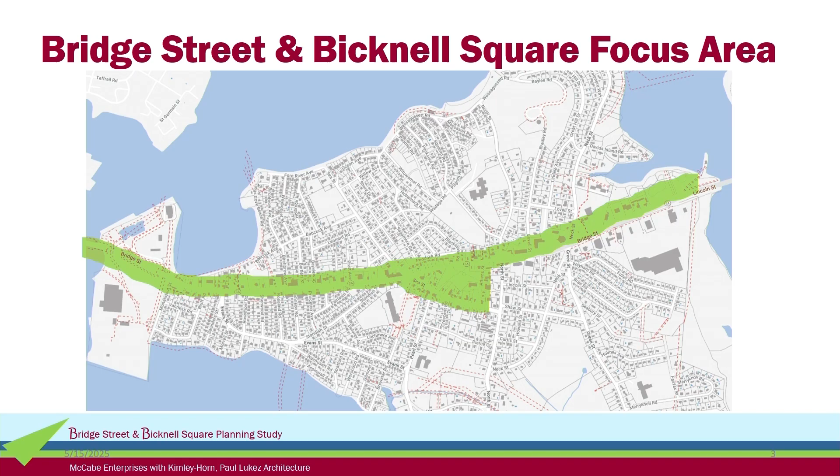The bright green is our focus area. Why we did a planning study wasn't just because the town got a grant. It's because there's been a long-time safety concern about speed and congestion on Bridge Street. There's been concerns about vacancies and really limited new investment in businesses and properties along Bridge Street. So things are getting a little tired in places. That was some of the impetus. Some of the key questions are: how do we make Bridge Street look better and be safer at the same time? So there was a dual focus there. And is the existing zoning helping or hurting new investment?

And how can we leverage what the town has been spending, much through grant money, but also all your tax money, in Beals Park as well as Wessagusset Beach, that are major public improvements in North Weymouth? So how can we leverage that to stimulate more private investment? Some of the faces I recognize from prior meetings, some of you may be new, so let's just do a quick overview of Bridge Street.

The study area is 1.85 miles, with 8.5 acres of pavement. There's almost 500,000 square feet of commercial space along Bridge Street, and 114 businesses in North Weymouth employing about 1,100 people. There's the Sea Street Historic District with 122 buildings and objects, plus 2 beaches, 2 state parks, 14 green spaces, and 2 rivers and the sea.

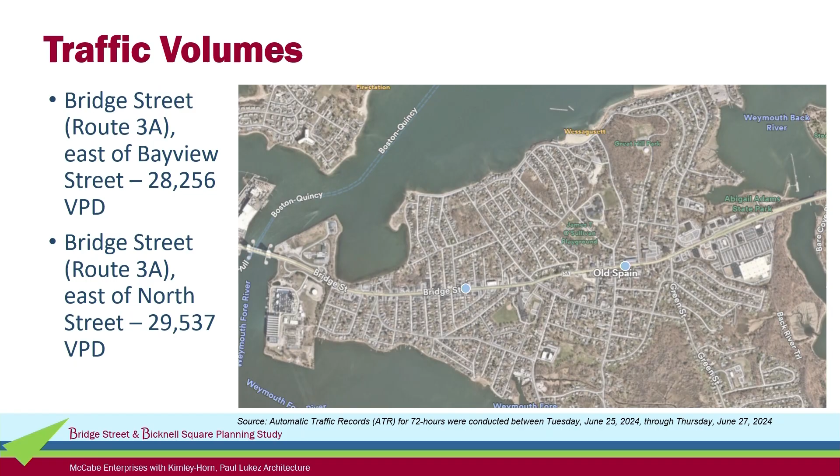The corridor is about in the middle of that picture. The 2 blue circles were locations where we did some additional traffic data collection. With that data collection, we saw that the Bridge Street volume of traffic last year, so post-pandemic, is really around 29,000 vehicles per day on Bridge Street. It may get a little bit higher, maybe down by Lowe's, where you have maybe some Hingham and Southern traffic coming up to Lowe's and then heading back. They don't traverse the whole corridor, but you can see it's a fairly good number in terms of amount.

It is about 4,000 to 5,000 cars a day less than we had measured about 10 years ago out there. So it's kind of interesting, even though it's still a lot of traffic out there. A lot of times the traffic also has some very distinctive peaks. In the morning, obviously, commuter traffic for a couple of hours, and in the afternoon, that peak commuter traffic as well. Then usually we see a trough during the middle of the day where volumes are a little bit lower.

So we also measured traffic speeds out there. Posted speeds change a little bit depending on where you are in the corridor. Bridge Street east of Bayview, we saw the 85th percentile speed. And 85th percentile, it's above the average. 85th percentile would basically be that speed where 85% of the cars in that spot are going 42 miles per hour or less, and 15% of the traffic would be going above that.

A lot of times in the historical past, we set speed limits by that 85th percentile speed. Bridge Street, east of North, we measured 37 miles per hour for that 85th percentile. That could have been related to a little bit more commercial activity down there, so things slowing traffic down, like the couple of signals there. In general, though, a lot of the traffic exceeded the posted speed limits between 5 and 15 miles per hour.

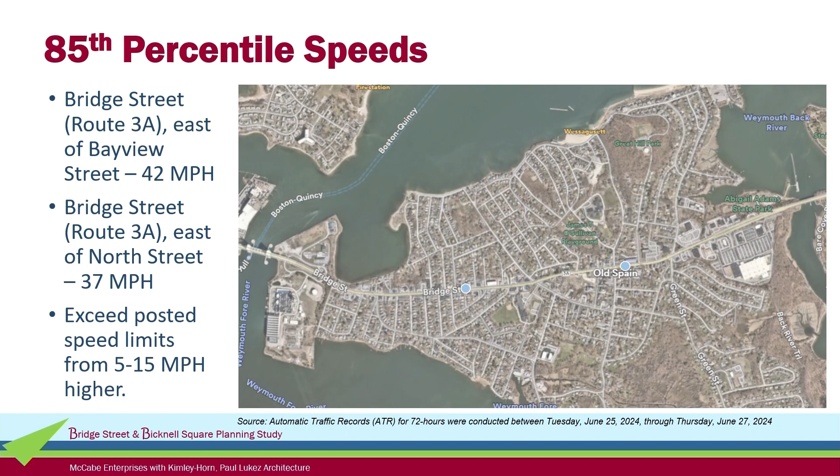So in the Safe Streets work, the Vision Zero work, we would become concerned when we started to see travel speeds exceeding 10 miles per hour or more above the posted speed. It'd be something to look at and go, what's going on? The speeds very much relate to safety and the severity of any crashes that occur out there.

In total, over a 6-year period, we saw 383 crashes reported on the corridor, 1 fatal crash and 7 serious injury crashes. We also look at crash types, daytime or nighttime. In addition, we saw 3 crashes with bicycles, 1 resulting in serious injury, and 7 crashes with pedestrians. One with a pedestrian was the fatal crash, there were 3 non-fatal injuries, and 3 where no one got really hurt.

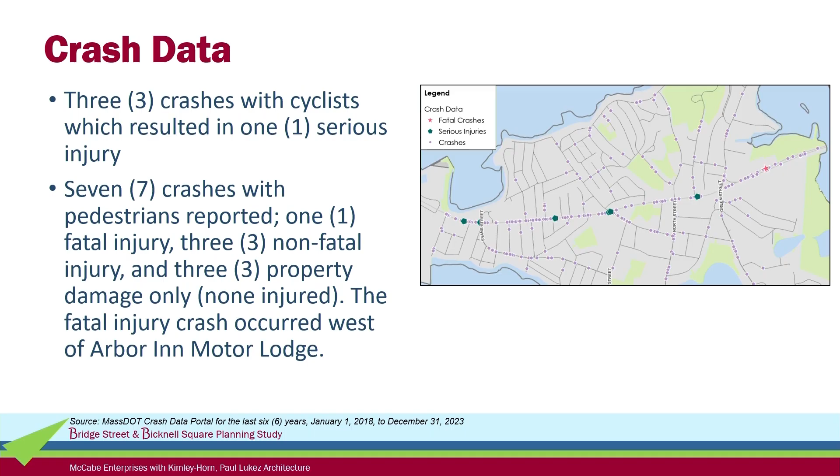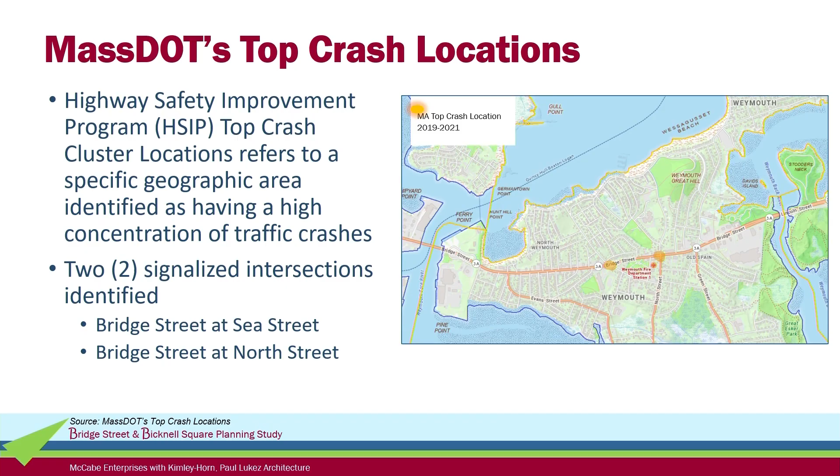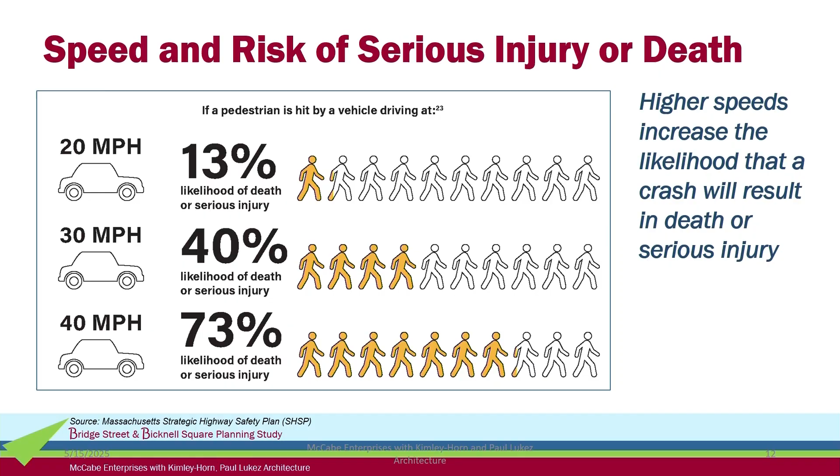So if everyone's going on Bridge Street at 40 or 45 miles per hour, and you're trying to encourage connectivity from one side of the street to the other, whether at a signal or not, people want to use the park or get to the post office. At that speed, if you're not safely crossed and you do get hit, it becomes a very serious injury or fatality.

So, summary of the analysis of the traffic conditions we saw out there, things to keep in mind as we go into identifying some potential actions to take. Certainly excessive speeds, above the speed limit. We'd like to get people driving a little slower.

The left turn movements, either from Bridge Street or trying to get onto Bridge Street from the side street, become difficult, especially in the peak hour when there's a lot of volume. During the peak hour, traffic might actually be going a little slower, but you can't get out there because of the volume. In the middle of the day, when there's less traffic, people are moving a little quicker, so that becomes an issue or a problem.

Shoulders are that part of the roadway outside the travel way and between the curb. Right now on Bridge Street, there's very little shoulder on much of the corridor, which also affects bike accommodation. If someone was biking on the street, that would be a difficult constraint.

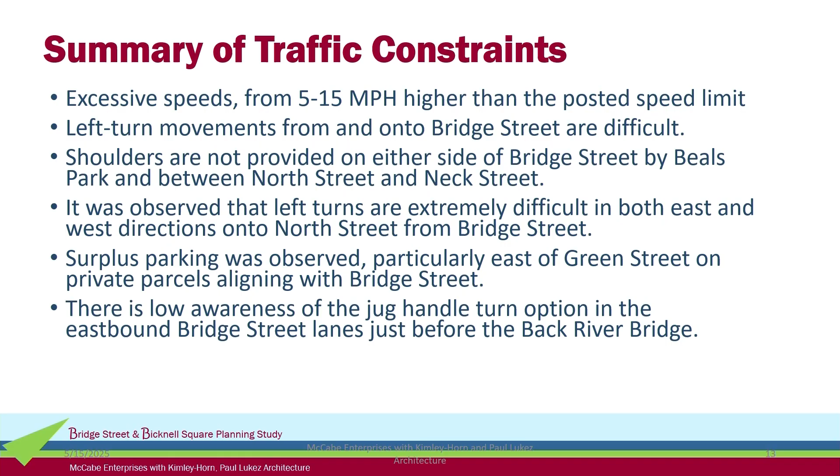We did look at parking in a very general sense, and it really came up during the land use and marketability of economics out there. A lot of the parking in the corridor is privately controlled. In some lots, and Kathy will probably talk about it more later, you have a lot of excess parking on private lots, but there's not much public parking unless you're parking on Sea Street and a couple other ways. I'm not talking about the neighborhood where you may end up being able to park on street in front of the houses.

And other things we saw out there, and Lisa will mention it again, but certainly walking along Bridge Street is not comfortable. The conditions aren't great. Some input we got over the last year, some people don't know to use the jug handle down by the Back River Bridge, down to the other side, the east side. That messes everyone up because you can't take a left onto Green Street at that area.

So anyway, we've taken a lot of these problem areas or issues, the data, as well as the input we got from all of you at the workshops last year, and that leads us to identifying some potential actions to balance the objectives that Kathy mentioned. How do you make the corridor safer and look better, if you wanted to look at the bigger overall picture. And Lisa.

So as Bill alluded to, we're going to talk about walkability, transit, what's out there today, and then kind of talk about the recommendations.

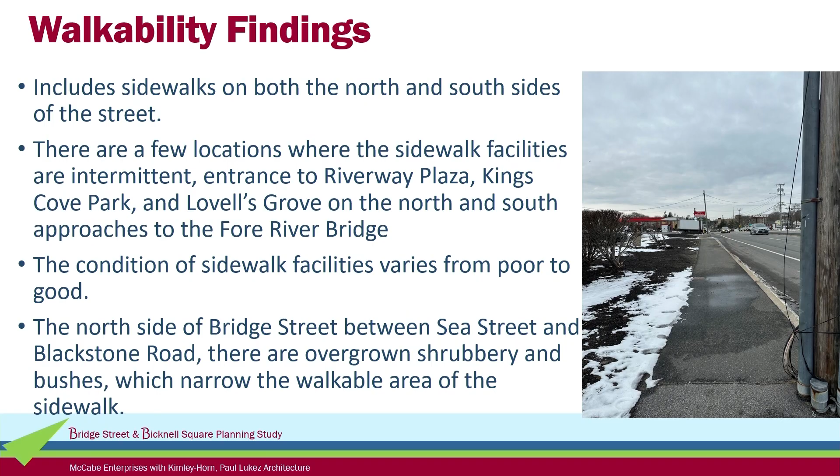Speaking with you all today in our previous meetings, sidewalks are generally provided on Bridge Street, north and south side, but the conditions are more poor to average. There are areas where it's really narrow, you can only fit one person, you can't walk side by side, and the conditions are overgrown, not maintained, not something you could thoroughly enjoy every single day. But really just understanding what's out there today.

We also took a look at the crossings. As Bill was alluding to, there are a lot of signalized intersections, and at these signalized intersections is where the majority of people can actually cross safely. As you remember when we were looking at speeding and how likely a person could die from a pedestrian or fatal or serious injury depending on how fast you drive, if there's no safe crossings outside of those signalized intersections, we really need to make sure that people can actually cross safely.

At 4 of the signalized intersections, what's great is that they have an audible pedestrian signal, indicating that when you press the button, there's a voice you can hear so you can cross safely in a certain direction. Not every signal has that. Neck and Green Street doesn't have it, as well as the shopping mall driveway.

Crosswalk markings are really just provided at the signalized intersections as we were alluding to, but there are a lot of side streets. Maybe they don't all have marked crosswalks, but you can cross at those locations. Our recommendation is really enhancing those.

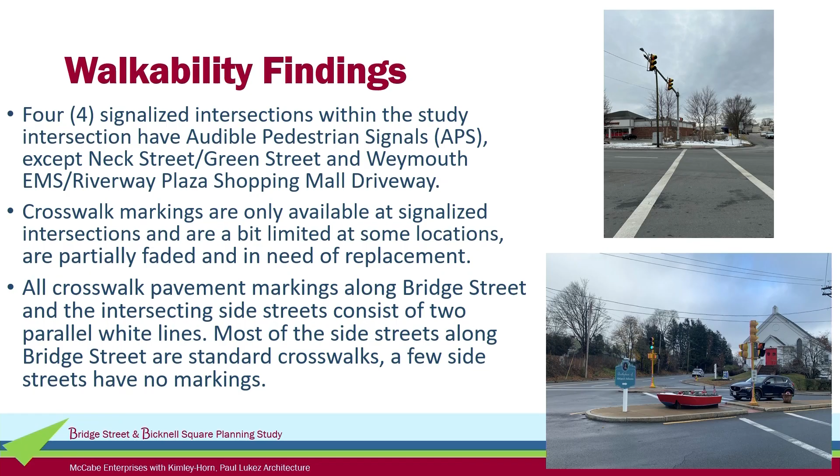These crosswalk markings are standard in the sense that it's just parallel lines, sometimes not as visible, but we're really looking at how we could enhance that visibility with our recommendations. As Kathy and Bill are alluding to, we want to make sure Bridge Street, Bicknell Square, is safe, looks good, and that people actually want to cross the street and enjoy the area, connecting the north and south side along Bridge Street, as well as the neighborhoods and parks.

As Kathy was alluding to, there's a lot of great things happening in this location. We just have to make sure that there's connectivity.

So in general, looking at the highlights of walkability, it's really reconstruct sidewalks. As we were talking earlier today, a lot of people were saying reconstruct the sidewalk, maybe widen some of the sidewalk areas, not just 5 feet but maybe 7 feet or so. Really making sure that the locations with overgrown shrubbery are maintained, because if it's not maintained, that sidewalk becomes really narrow.

Looking at these existing standard crosswalks, just parallel bars, we want to identify those locations and make them more visible, making sure that when you're driving or walking you can actually see those marked crosswalks, along the signalized intersections as well as those side streets.

We talked about crash data, and Bill was talking about how when we look at crash data, we look at lighting conditions. So really just making sure there is pedestrian lighting along the corridor, so that when you are walking there is safe connectivity and people can see you.

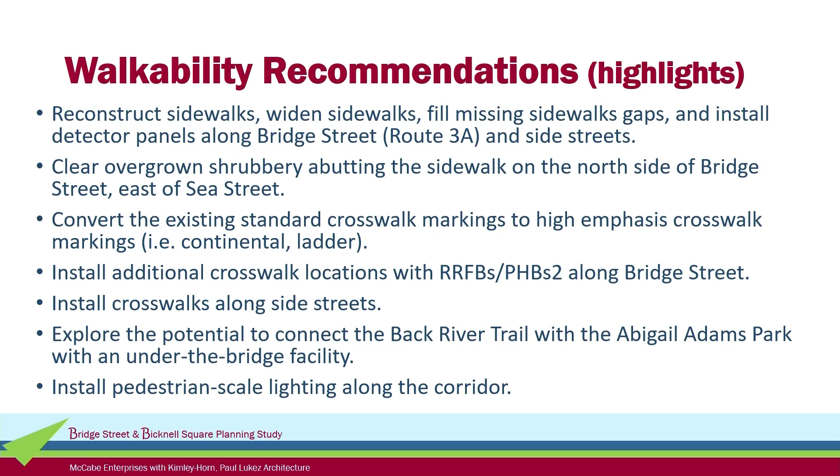So we talked a little bit about vehicles and traffic, Bill covered that, and we just went over the pedestrians. Now we're going to talk a bit about transit and really understand what is out there today.

So there are 2 bus routes along the corridor, Route 220 and 222. What's great is that when you're taking the bus, it really helps you get somewhere if you don't have a car, or if something is happening with your car, you have another mode of transportation.

So there are 2 routes, and there are a lot of stops, and a lot of connectivity with these bus routes. When we look at bus route 220, which is along the corridor, it connects you through Quincy Center, as well as the Red Line, and it can connect you to the commuter rail. Along this route, there are about 14 bus stops along the corridor.

Then when we look at bus route 222, very similar, it connects you to Quincy Center, to Bicknell Square, as well as other locations, but also connects you to the Red Line as well as the commuter rail. There are 10 bus stops along the corridor, and there's 2 stops in Bicknell Square.

So when we're looking at these transit recommendations, we're looking at what has already been done. The MBTA has done a better bus network, really looking at how these routes can be a little bit more accessible, usable, or a little bit more friendly.

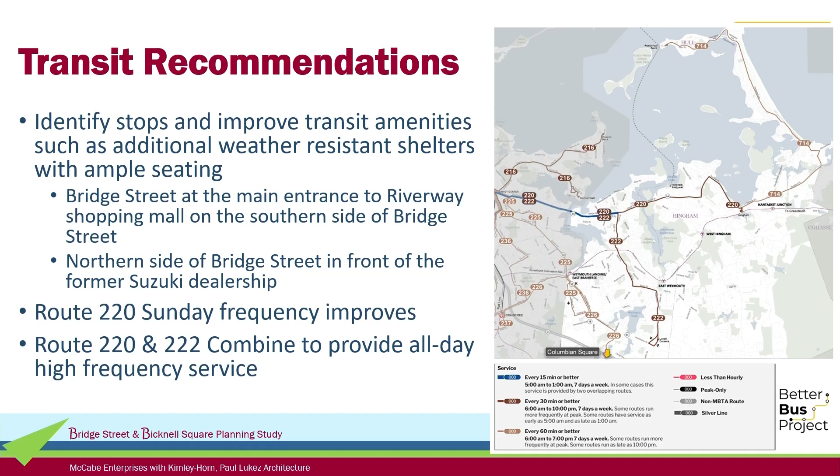It's not just supposed—really, we want to make sure that there are shelters, that it's weather resistant, especially if it's raining, hot, or snowing, just making it a little bit more accessible and reliable, so that people would actually want to take the bus as a mode of transportation. I will hand this off to Bill, where he's going to talk about the recommendations.

Okay, thanks, Lisa. So one thing I did want to mention, and you all probably know, is that this is a MassDOT roadway—they own it, they maintain it. So any changes or improvements are going to have to go through, or be done in collaboration with, them.

About 10 years ago, they started to look at the corridor to try to make some improvements. I'm not sure exactly why, but it sort of got put on the back burner for a number of years. They brought it up through some early analysis, and then it stopped for a long time. They did make some improvements, like some of the handicap ramps were redone over the years, and they did resurface it. I think they had so much else going on in the state, in the region, and even in the town with Main Street, that they probably figured, let's resurface it, keep the road going, and we'll come back and revisit it.

So as part of this project, we have had some communication with them. At one point, they initiated a call saying, 'Hey, we know you're looking at Bridge Street from the land use study.' They participated in the Vision Zero Safe Streets for All project, so they knew what was being looked at in some of our committee meeting discussions. So I think there's a renewal of interest on DOT's part to start to re-examine the corridor and come up with some improved actions.

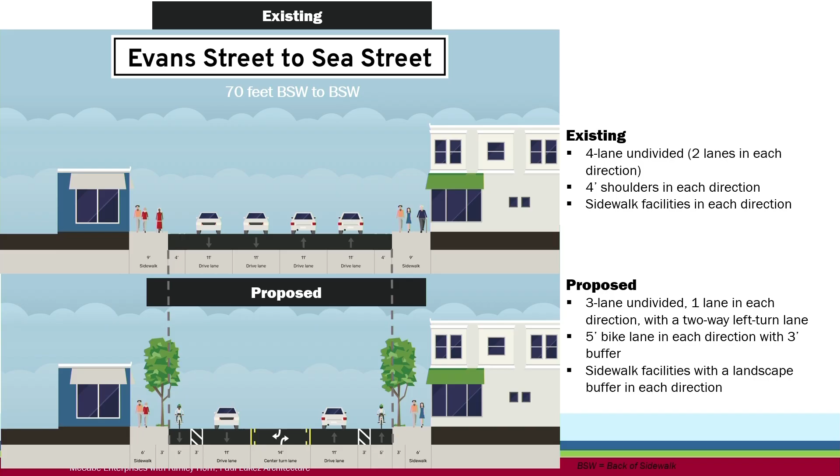And this is just some diagrams of it. So up top, you can see just an illustration of 4 travel lanes, the sidewalks down below. If you repurpose that pavement a bit, you're able to either provide that extra room on the edges of the road for biking, as well as tree planting, lighting.

And also, there may be areas where you just widen the sidewalk. This is a similar type of thing. I know we did get comments at one of the workshops, especially as we get down to Neck Street and Green Street, for the call for left turn lanes on Bridge Street to turn into these areas, as well as signal changes to protect the person making the turn into that.

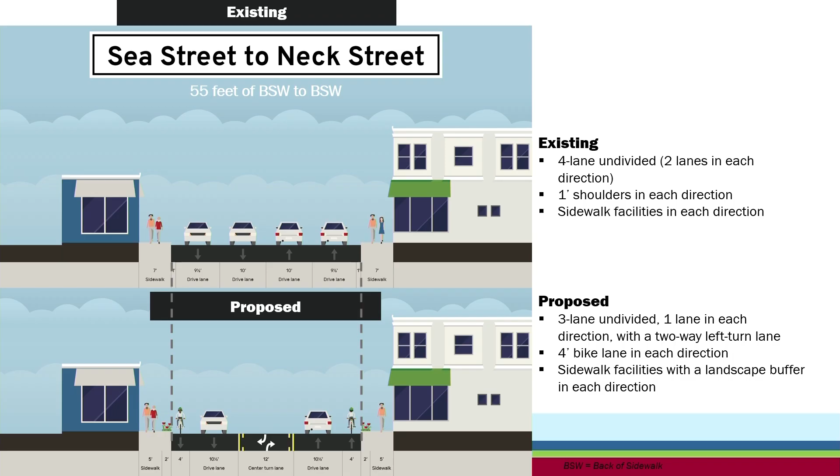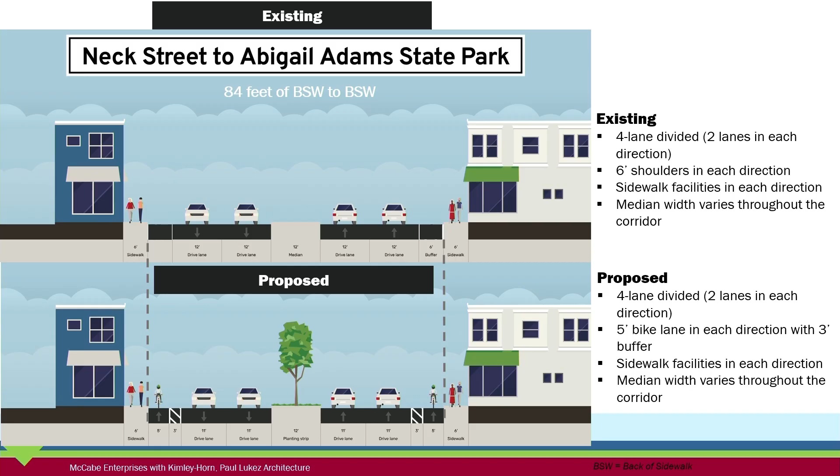And then really, as you go down towards Hingham, because of the commercial activity down there, the large commercial, and the higher volumes, then that area would stay 4 lanes. Certainly needs some signal improvements. None of the things I've talked about really get to - we've got pedestrian actions, mid-block crossings, you've got a 1.8 mile long corridor. Right now, you can only cross at the signals with some protection. In our minds, it's too long a corridor to just have those locations, so we want to have some mid-block locations with some type of signal protection.

Bridge Street at Sea Street, we're talking about upgrading that traffic signal. If you remember, it has a little island for people coming out of Sea Street to make a right turn onto Bridge Street. Potentially, we're talking about tightening that up, getting rid of that little free movement, trying to improve pedestrian movement to cross Bridge Street. If we don't get rid of that little turn lane, then bring that pedestrian crossing - another thing we heard was, well, you don't have any protection to cross that little right turn lane, so I've got to get to that island, and then I've got to get across Bridge Street.

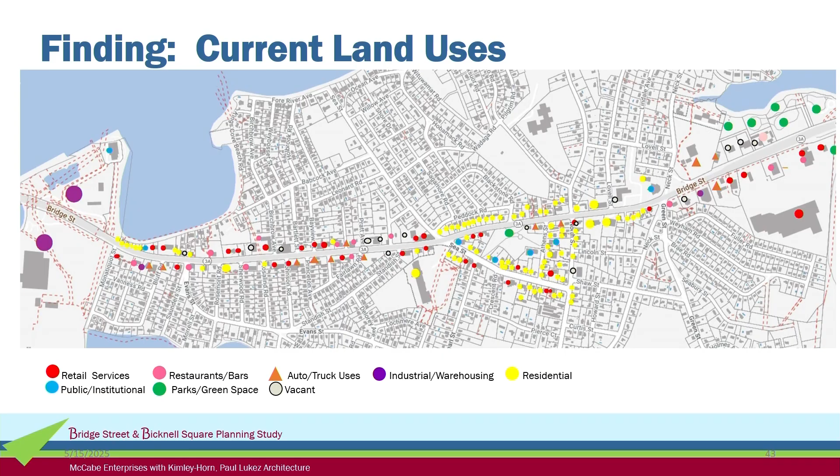That's where you see the red and kind of magenta for restaurants and bars. You also have the brown triangle for auto uses, concentrated there, and we want to focus on trying to strengthen that area, and looking more at mixed use between Monatiquot and Sherwood, as well as enabling mixed use in the future.

In the center, you have neighborhood center district zoning already, and you would maintain that. Then east of Neck and Green, you've got your B-2 commercial area, your commercial corridor.

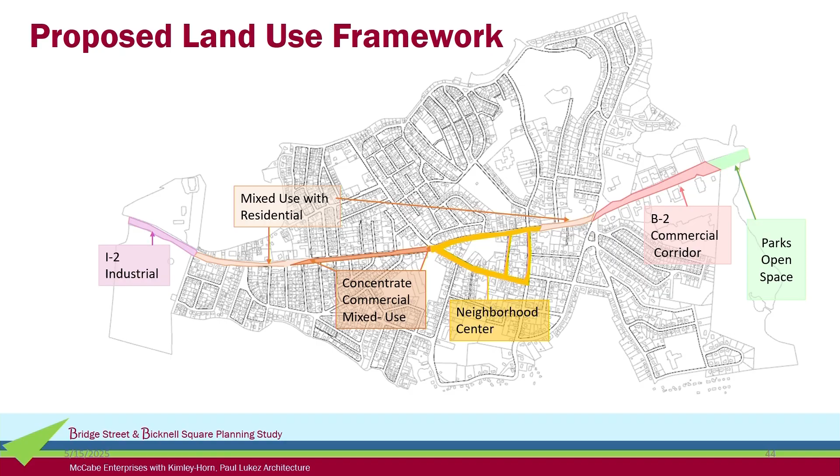That needs new investment and improvement, particularly where some of the vacancies are on the north side of the street, as well as on the south, but those are a little more isolated, and you've got the strength of Riverway Plaza.

So as I've summarized this, one of the things we would say is on the two ends, where we talked about mixed use with residential, we would recommend disallowing new auto-related uses.

I know there's a Prime gas station there now. They would be allowed to stay as long as they maintain as a gas station. But if they were to ever close and be closed for more than a year, that use could not then become a new gas station or new auto-related use.

So really, the goal is to keep the auto uses in your concentrated commercial area, or east of Neck and Green Street. And also, with the mixed use with residential, allow residential not just on upper levels, but also on ground levels, to kind of keep moving it forward.

One of the key issues in your zoning is your parking requirements. And right now, you require 2 spaces for every dwelling unit.

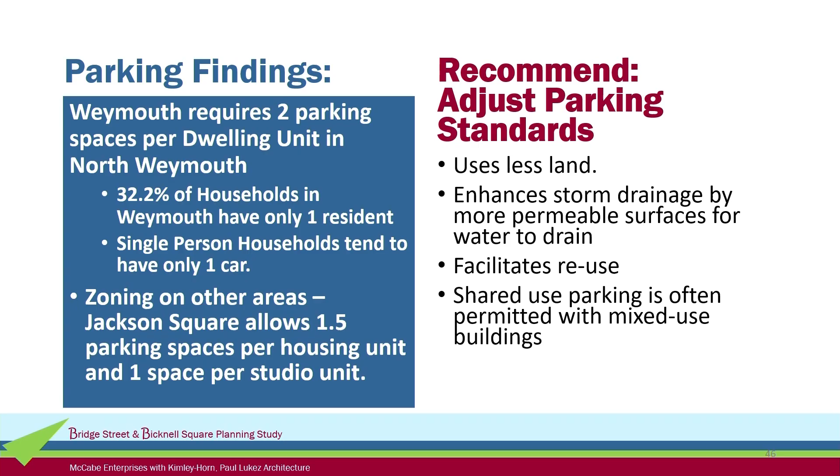So even if a unit is a studio or a 1-bedroom, you require 2 parking spaces for it. In Jackson Square, they're allowing 1.5 parking spaces per housing unit. You've got a third of your households in Weymouth that only have 1 resident, so unless they're a car collector, they're most likely only going to have 1 car. We need to be a little flexible and rethink about it.

Some of the things about adjusting parking standards: it uses less land, so you have more permeable land, which is good for rain and stormwater. It facilitates reuse, and also having shared use parking is often permitted with mixed use buildings, so that's a plus.

So some of the strategies are that we would encourage flexibility in enforcing the parking regulations by the Zoning Board of Appeals and during site plan review, so they could be evaluated on a case-by-case basis. We think North Weymouth is the only village center in Weymouth that does not have a municipal parking lot, so when an opportunity comes up for municipal acquisition and creation of some small parking on both the north and south side, we'd suggest the town do that, but we haven't identified any specific locations. We think it would be better in close proximity to the concentrated commercial area.

We would lessen the minimum residential parking to 1 space per unit for 1-bedrooms and studios, and 1.5 spaces for 2-bedroom units. Again, we think there should be some flexibility. One of the things about trying this out is to see how it works - if you find it's a problem, you can always exercise your flexibility and not give that opportunity to people.

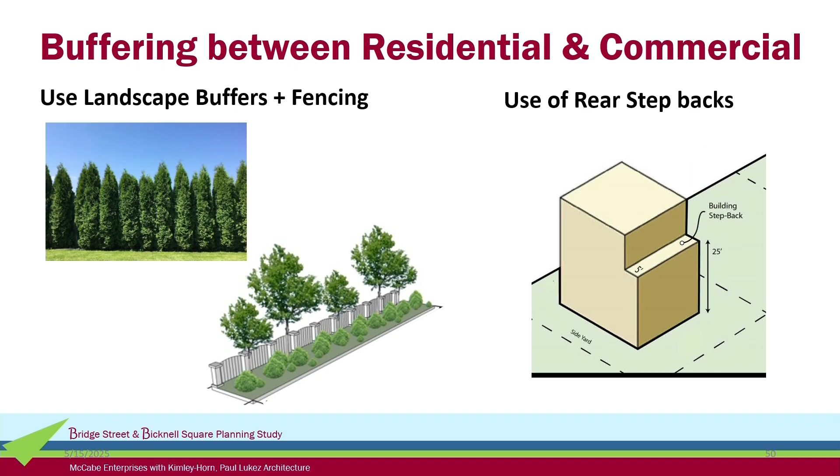So if you look at where that kind of olive green wall is, think of that as the back of the building facing the backyard. After the first story or the second story, the building would not go straight up, it would be set back or stepped back so that you have less shadow and a little more privacy. It's a building construction strategy that makes for better neighbors. So that's something to explore.

From a Commonwealth perspective, the potential flooding is in the roadway by 2030 due to what they anticipate would be sea level rise or storm surge in the event of a hurricane or northeaster. So while it's not a long distance along Bridge Street, this was an area that was also identified as highly prone to erosion, and the depth of flood that is projected could be as high as 18 to 24 inches in 2030. That's only 4 years from now.

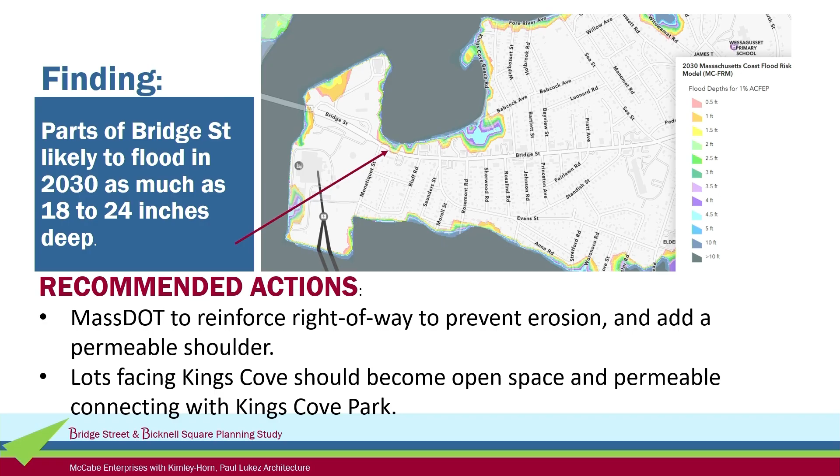So we have covered the waterfront, and we've talked about market and land use and some of the implications of zoning, and we've talked about traffic and walkability and transit, and I promised you that you could go first in your comment, and I saw a couple of hands, and I want to be able to address that. So I want to open it up to your comments.

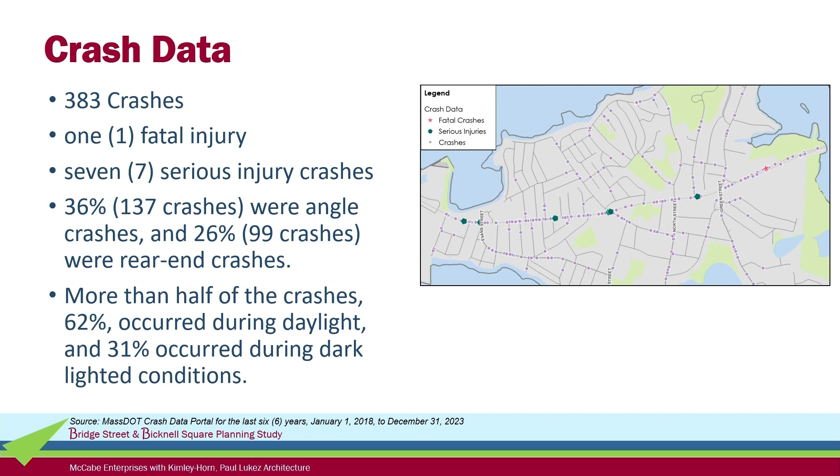You're right, a lot of the things you've raised, the data shows there's a lot of different actions. We didn't go through every single one, but when you update the traffic signals, you look at the timing. People at a couple of the workshops at a couple of the intersections said they don't feel comfortable making a left turn at this signal because there's not an arrow. So it's taking a look at that, and can you put the arrow in and still make the signal work?

The pedestrian improvements we've talked about at the intersections would be better markings, better pedestrian indications. But then also along the route, there may be some mid-block areas where, with certain types of signals, you can stop traffic to let a pedestrian cross.

The only other thing I'll say is, along those lines of 'well, I don't see many pedestrians or bikes out there' - Kathy mentioned that as she walked along the whole corridor, you do see them. Sometimes people aren't there because things aren't good.

I noticed even in the town I live in, for almost all the time I've lived there, there was not a sidewalk on the main street. You would occasionally see kids or adults walking in the road because that was the only place they could be. Then about a couple of years ago, they put a sidewalk in along one side, and all of a sudden you just see people on the sidewalk. They probably were walking in their neighborhood before, but now the sidewalk is on the main street, they come out and walk down to the store, or go jogging a mile, on the sidewalk. So sometimes not having the good facilities or the things that make you feel safe and comfortable prevents people from making a good decision.